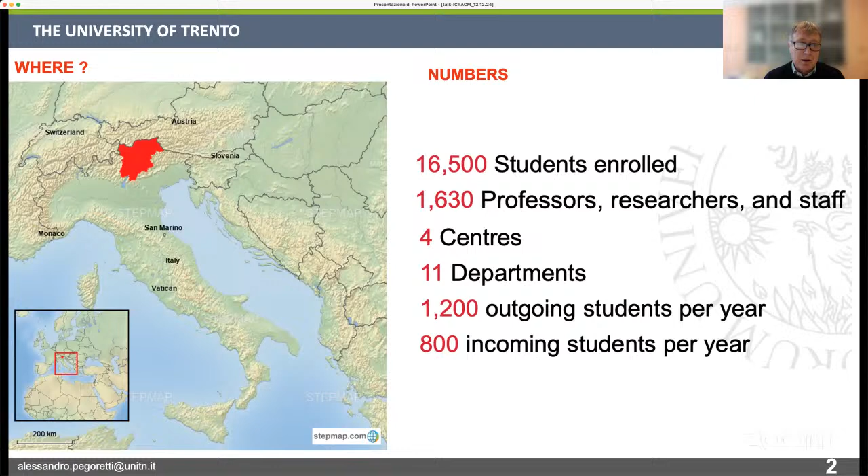First, let me briefly introduce the University of Trento. It's located in the north part of Italy, at the border with Austria and Switzerland. It is a medium-sized university in the Italian panorama, with roughly 16,500 students, 1,600 professors, and 11 departments. The Department of Industrial Engineering is one of them, composed of roughly 100 people between academic and administrative staff, and 200 people between PhD students and postdocs. The research areas range from materials, mechatronics, electronics, management, and biomedical. These are also the areas covered by our master courses, which are all given in English, making it an opportunity for abroad students to attend.

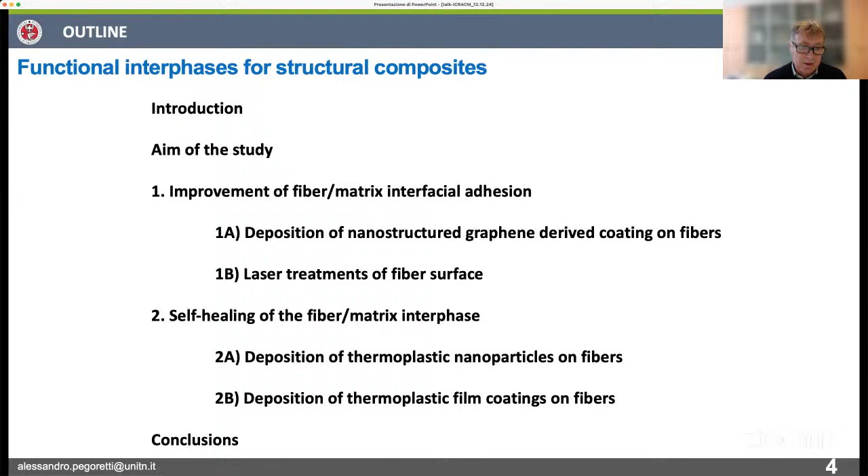Today I will focus my attention on functional interphases for structural composites. After a brief introduction, I will introduce the aim of the study, and then describe two areas in which we are currently working. One is the improvement of the fiber matrix interfacial adhesion, and I will show a couple of examples. Then I will move into another area, which is the self-healing of the fiber matrix interphase, and I will try to provide two examples of the typical activities we are running here at the University of Trento.

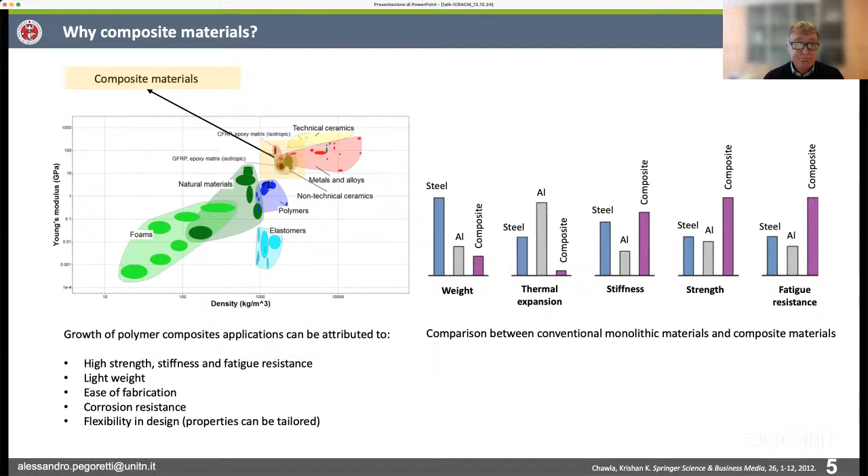Just a brief introduction on composite materials - I think it is not needed due to the type of conference, but we know that we use composite materials mostly because they are very light. They have a very low thermal expansion coefficient, and at the same time they are very stiff. They have very high strength and very good fatigue resistance. Applications are very wide, ranging across several applicative areas, the main one probably being transportation in terms of share.

For the market concerned, it is estimated that roughly 12.7 million tons are used worldwide, according to a recent survey by JEC Observer at the end of 2022. This represents a market value of about $40 billion in terms of material, and more than 100 billion in terms of components.

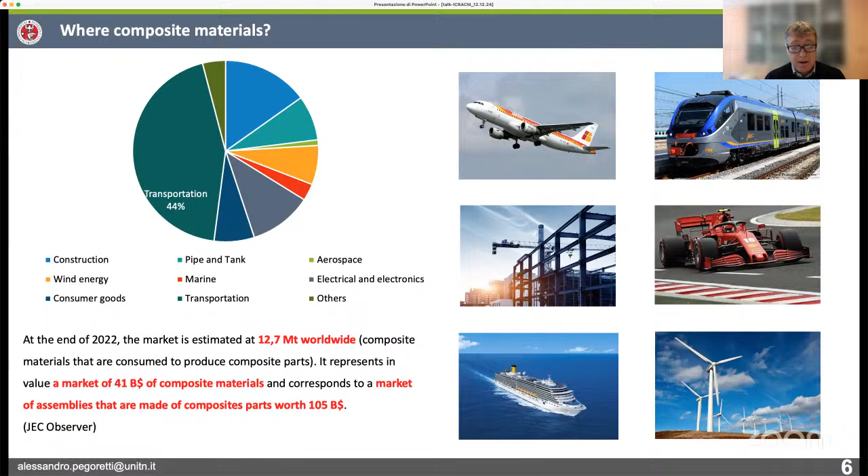Why is it interesting or necessary sometimes to focus on the interface? This was actually discovered years ago, when the first studies on interface and interfacial adhesion date back more than 40 years. It is, of course, a region in which a lot of properties are determined depending on the intensity of the adhesion, but also a region which offers opportunities to tune the properties of composite materials.

In terms of interactions, we can range from macromolecular interdiffusion, chemical bonds, electrostatic attraction, and also frictional roughening, thermal contraction, or mechanical interlocking. These are the main types of actions which can be tuned in order to adapt the mechanical properties of the composite material to the final application.

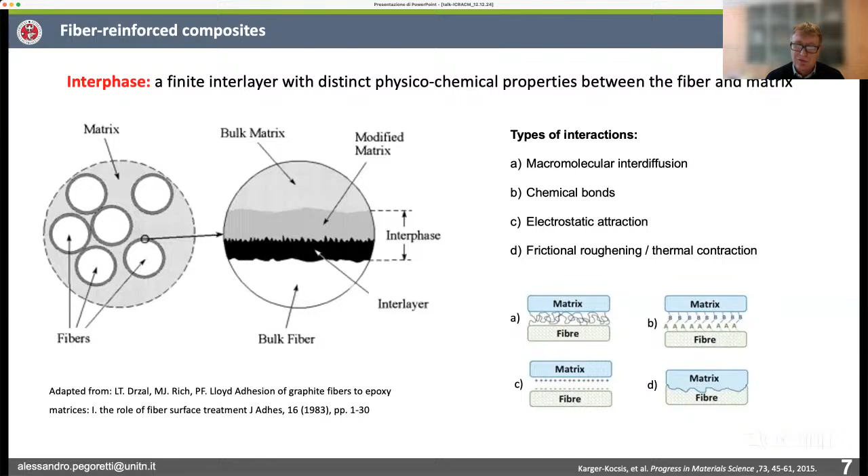In terms of experimental methods, it is interesting to observe that over the years a number of different testing methods have been developed. The most rigorous are based on single fibers embedded in polymer matrices, or in metallic or ceramic matrices, but mostly polymeric matrices. Some tests also regard the use of bundles of fibers, but if you browse the literature, the main two are the micro-debond test, which is widely used here in Trento—we have developed a facility to test combinations of fiber and matrix according to this technique—and the single fiber fragmentation test, which is also possible to perform here in our laboratories.

In the first case, the load necessary to debond a single fiber from a drop of matrix is basically measured. In the second case, the fragmentation test, we are measuring the length of the fiber when the saturation of the fragmentation process is reached, which is proportional to the critical length. We then try to find a link between this critical length and the adhesion at the fiber matrix interface.

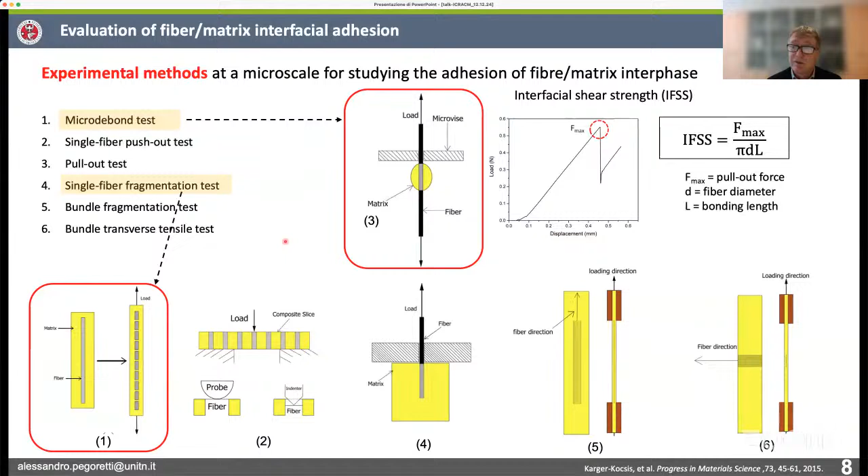In this area, regarding how to improve or modify the fiber matrix interfacial adhesion, there are two approaches: one is to modify the matrix, and the second is to modify the fiber.

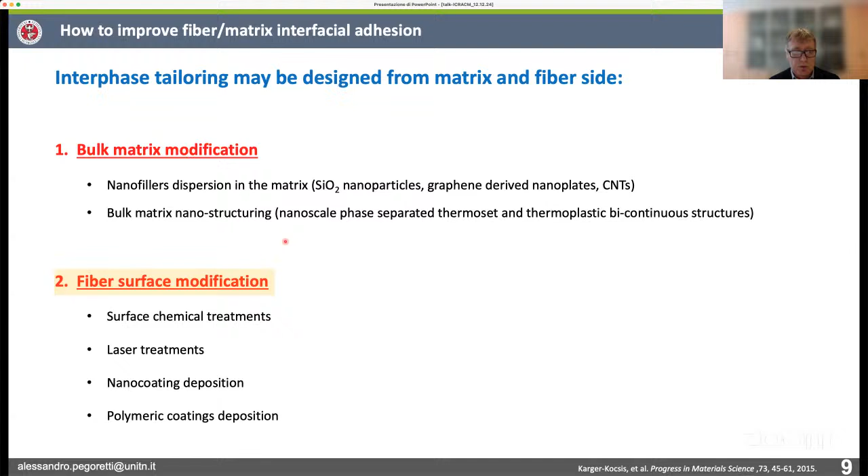In this talk, I will mostly focus on the second one, which implies some modification on the surface of the fibers in several ways. We can, for example, have a chemical modification by some chemicals deposited on the surface of the fiber, typically silane or titanate. We can also try to modify the surface of the fiber by laser treatments. These have recently been introduced due to the rapidity of the treatment and the possibility to tune the effect, as I will show you later.

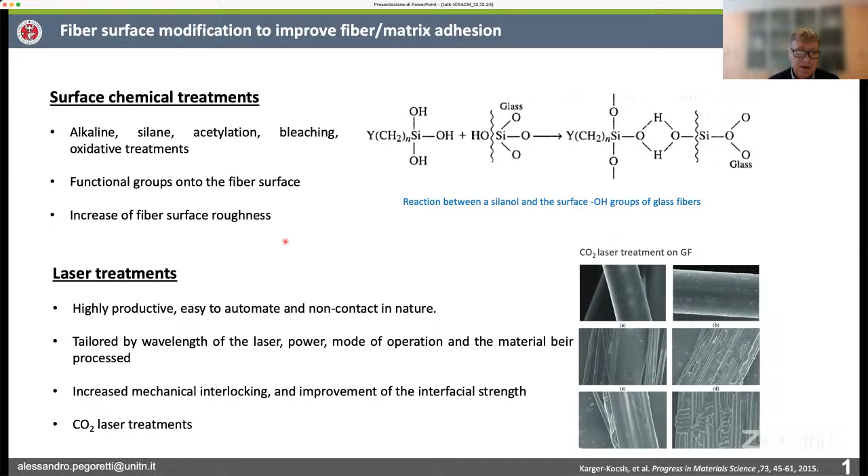Another possibility is to deposit either particles, for example nanoparticles, on the surface of the fibers—and I will provide some examples in this field—or to deposit a continuous coating, for example a polymeric coating, on the surface of the fiber in order to tune some of the interfacial properties. In this case too, I can provide some examples.

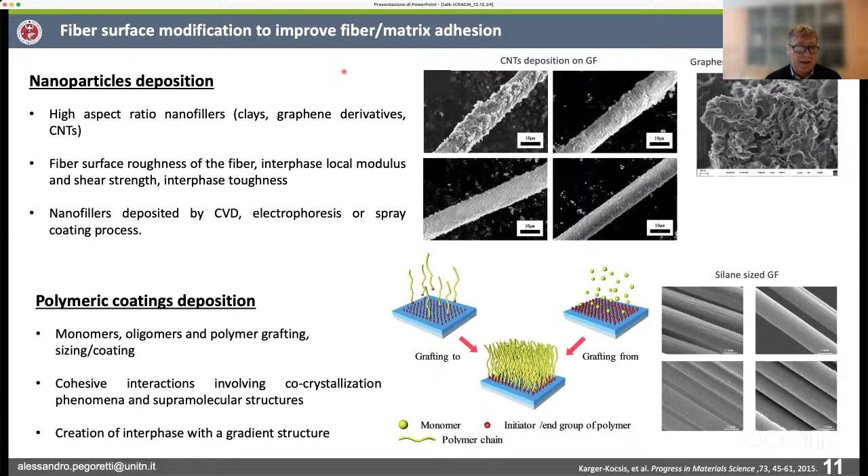This is why I call this talk multifunctional. I use this adjective because by tuning the fiber matrix interface, we have the possibility to induce some functionality in the composite material which is not present in the uncoated or untreated fibers.

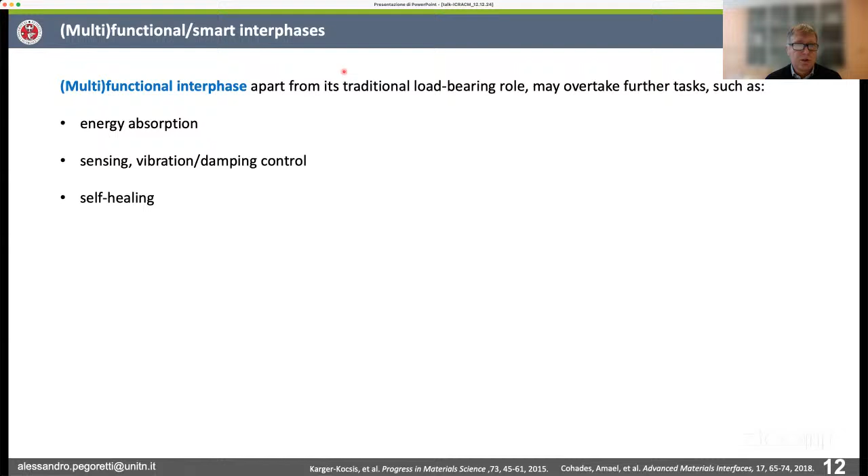For example, we can induce the capability in the composite material to sense external stimuli, such as mechanical strain. We can monitor the strain by changes in electrical resistance, which implies the composite material should be conductive, which is not always the case. If you think, for example, of epoxy glass composites, these are typically non-conductive, but they can be rendered conductive by properly coating the fibers in a suitable way. We can also increase or reduce the damping properties of the material, depending on the need.

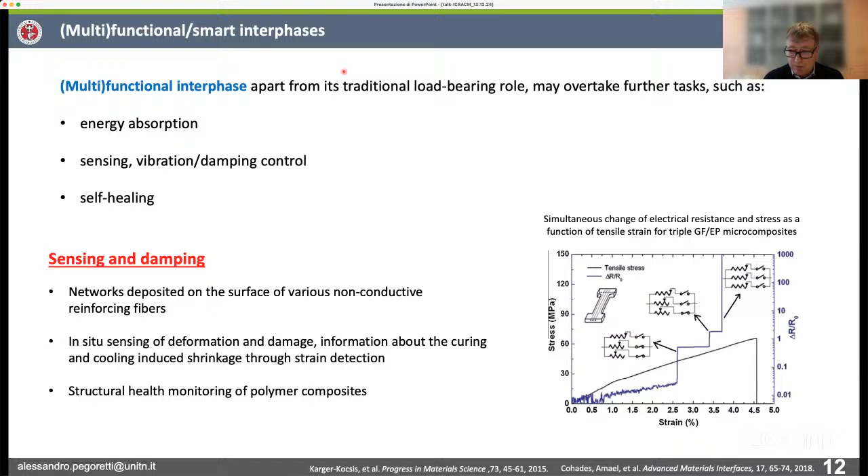Another very wide subject, quite intensively investigated today, is the capability to repair the composite material, the so-called healing or self-healing, depending on the external stimulus. This also regards the possibility to repair the fiber matrix interface—this region can also be repaired, as I will show you later in a couple of examples.

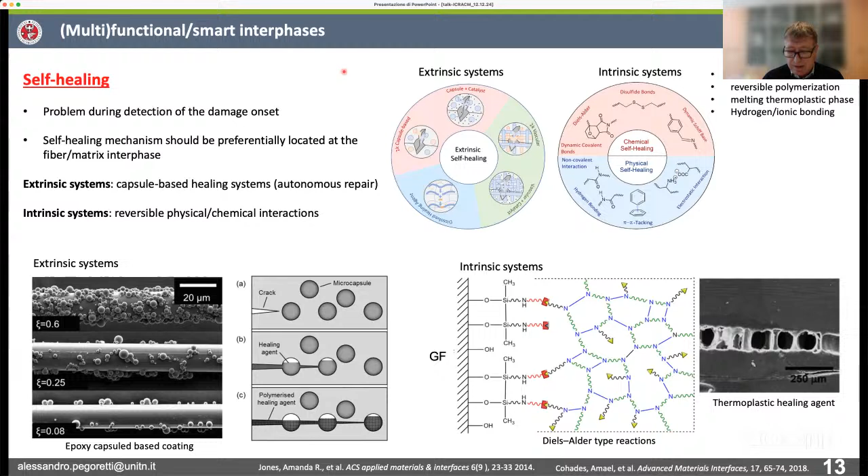This brings me to the aim of this study, which is interphase tailoring. In particular, we target two issues. One is whether it is possible to improve the fiber matrix interfacial adhesion. A couple of examples I'd like to show you: how we can improve this by depositing nanostructured materials such as graphene on the glass fibers, or how we can modify the chemistry, porosity, and roughness of the fibers by laser treatments.

This technique was applied on basalt fibers, and I will show you later the results that we can reach in this area.

Another area, as I mentioned before, is the possibility to somehow restore the initial mechanical properties after debonding or detachment of the fiber from the matrix due to a mechanical load. In this area, we try to achieve this in epoxy-based composites by depositing either thermoplastic nanoparticles on the fibers or a continuous film coating composed of a thermoplastic polymer on the surface of the fibers.

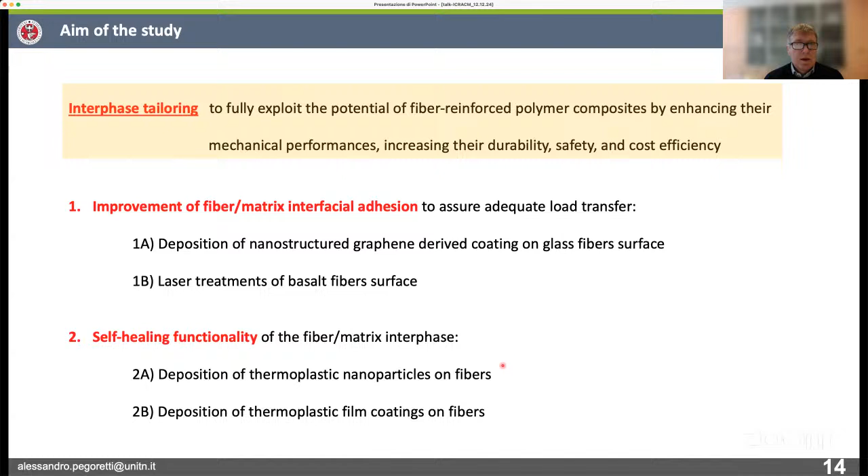Initially we started working with this technique, which is a relatively simple one. Here you can see the type of materials we use: an epoxy resin, and we selected some E-glass fibers. We also produced graphene oxide using the standard Hummers method, starting from graphite.

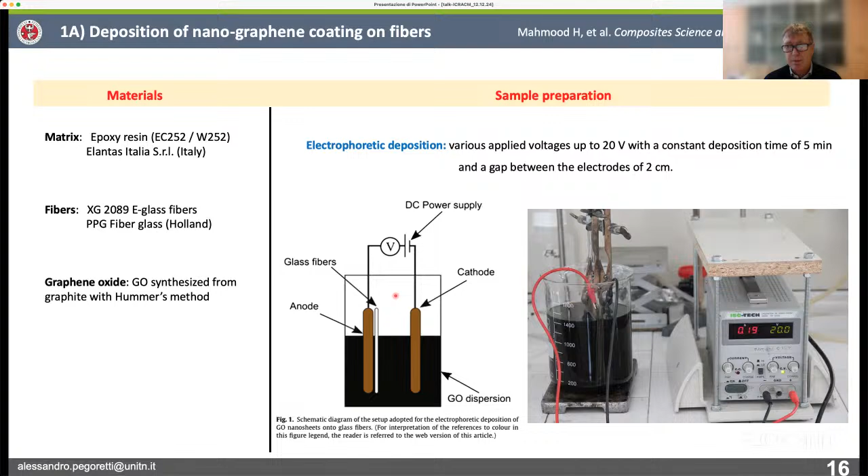We disperse the graphene oxide in water, basically in a very mild solution. Then we use electrophoretic deposition to force the coating of glass fibers with a layer of this graphene oxide. Here you can see the laboratory setup we use for this very simple experiment.

The experiment is simple, but the effects are very interesting, because you can see how it is relatively simple to coat the glass fiber with a continuous coating composed of graphene oxide. Here you can see that by changing conditions, for example the voltage used in the electrophoretic deposition, it is possible to change the thickness of the layer deposited.

It is also possible to chemically reduce the deposited graphene oxide to reduced graphene oxide, which at this point becomes an electrically conductive layer.

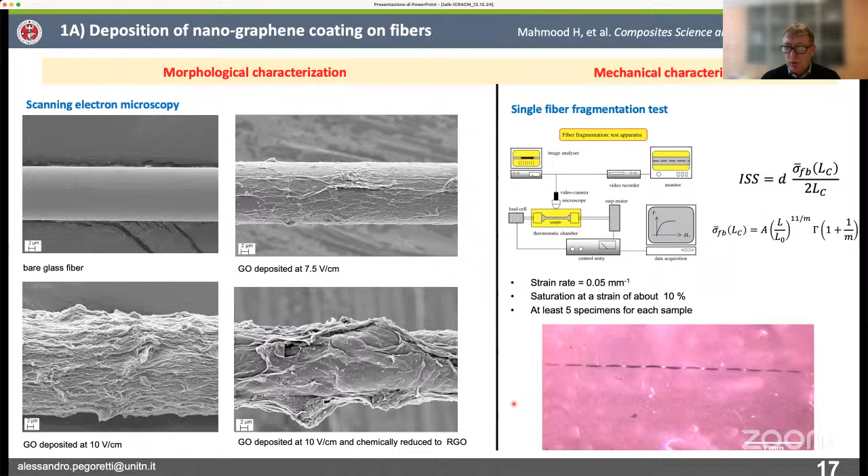How did we measure the effect on adhesion? We used the single fiber fragmentation test. Here you can see the configuration: basically we embedded a single fiber in a coupon of matrix, then loaded this coupon, and with a microscope we observed the generation of fragments, which are quite evident in this picture.

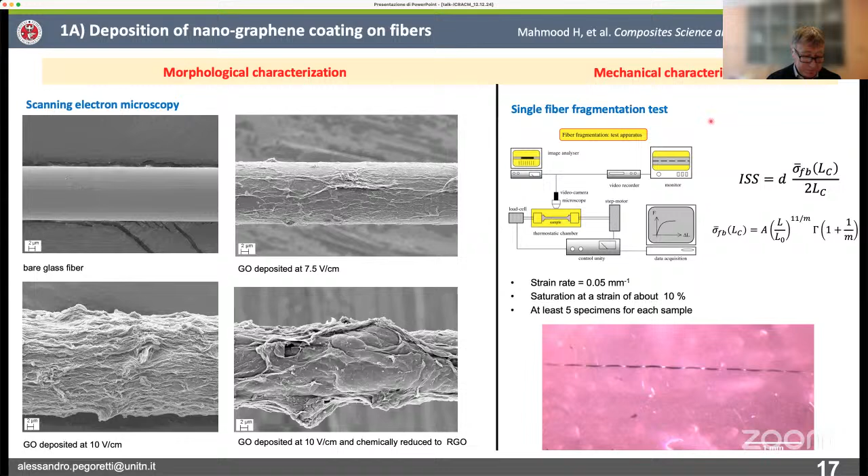At the end, when saturation of the process is reached, you get a length called the saturation length, which is proportional to the critical length. This critical length allows us to determine the interfacial shear strength. This is the typical way this data is collected and analyzed in the literature.

If you look at the effect, we can observe a clear increase in interfacial shear strength as we increase the electric field used in the electrophoretic deposition. Let me point out that an increase in electric field means an increase in coating thickness, as documented by this data, which reports the weight increase in the fabric tissue we use under different electric fields.

As for the improvement achieved, we reach a very high improvement in interfacial shear strength—more than 3 times—by using graphene oxide, and a bit less, around 88%, by using reduced graphene oxide. The situation is documented in this plot.

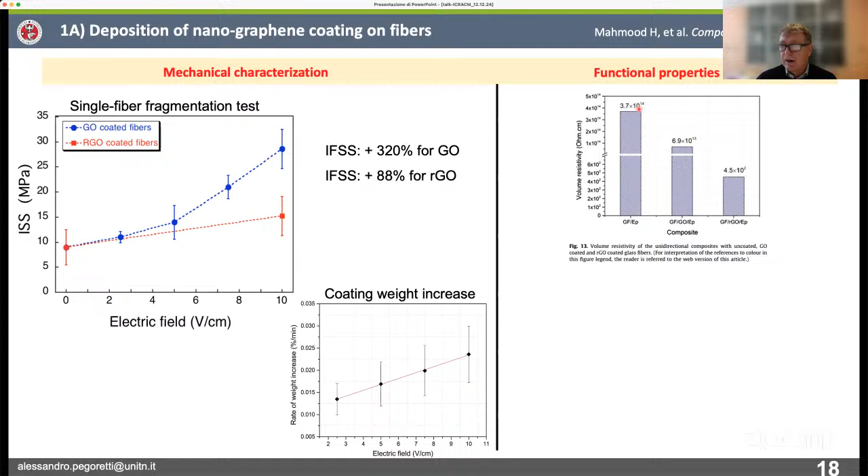A side effect, but a positive one for some applications, is that by using reduced graphene oxide, the resistivity of the composite decreases. If you look at this bar, we reach a resistivity in the composite material that is very low, meaning quite high electrical conductivity, especially compared to the uncoated materials. So we move substantially from an insulating to an electrically conductive material.

And we test the material under tension, while simultaneously measuring the electrical resistance.

Here the two quantities, the stress and the strain, and concurrently the change in electrical resistance are simultaneously plotted in this slide. You can see that by monitoring the change in resistance, it is possible to estimate the strain and therefore the stress applied in the composite material. So it's possible to monitor a structure by measuring the change in electrical resistivity.

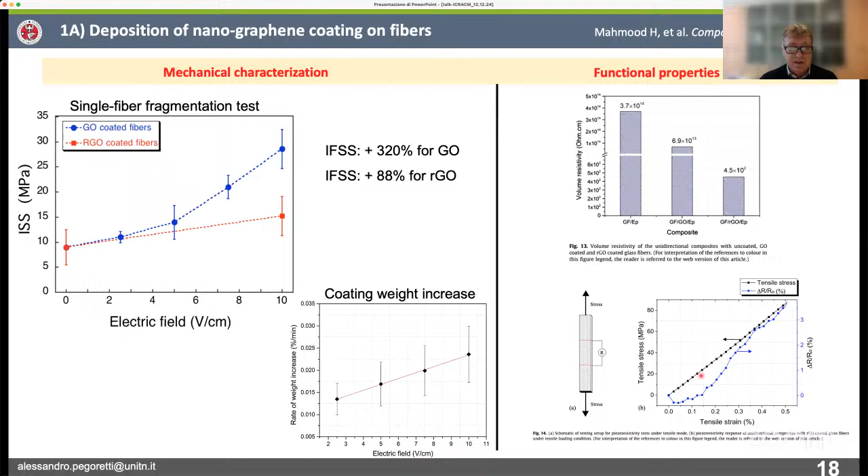In order to scale up the process, because the electrophoretic deposition equipment we used was a very small one, we use another technique, which is tribo-electrification.

It is a very simple concept. Basically, when you are sliding two different materials on top of each other, you can generate charging in one of the two, or in both actually, and by selecting the proper triboelectric series, you can force positive charges onto the surface of glass fibers.

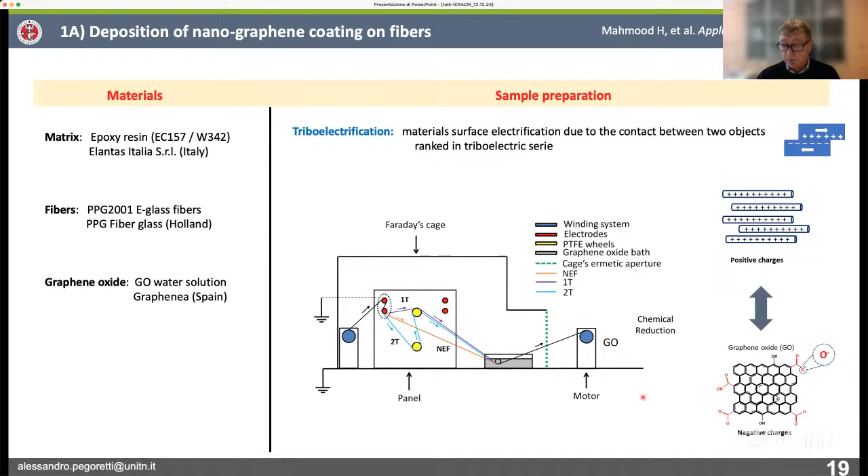In this case, we use Teflon rollers on which the glass fibers were rubbed. At the end, you get a positively charged fiber, and if you have a bath, like in this case, containing negatively charged graphene oxide, you can obtain a coating on the fibers by a very simple technique. Here you can see some pictures of the coating we achieved.

Here you can see different percentages of graphene oxide in the solution, and also different intensities of the rubbing against the Teflon rollers.

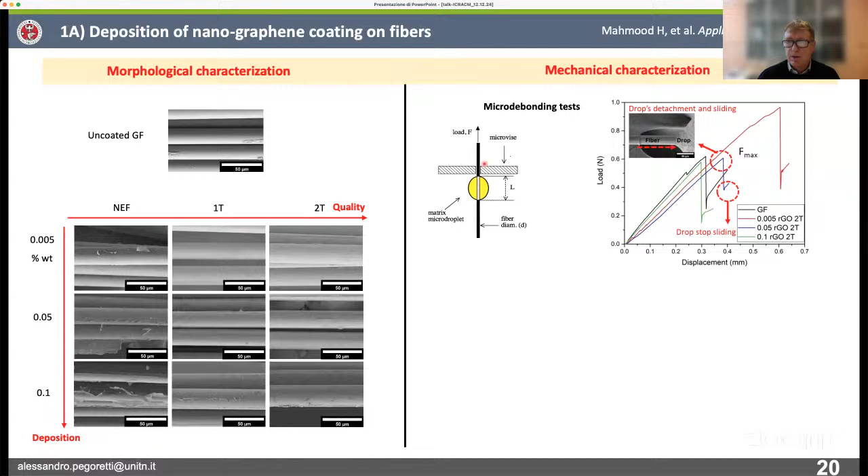In particular, we measured the micro debonding by using a very simple test that I already introduced before. By measuring the maximum load, which can be normalized to the contact area between the drop and the fiber, it is possible to obtain an interfacial shear strength.

on the surface of the fibers. With proper optimization of the conditions, it is possible to increase the adhesion from the initial value by a factor of roughly 0.5, so roughly 50%. This is basically how we can improve the adhesion in a relatively easy way.

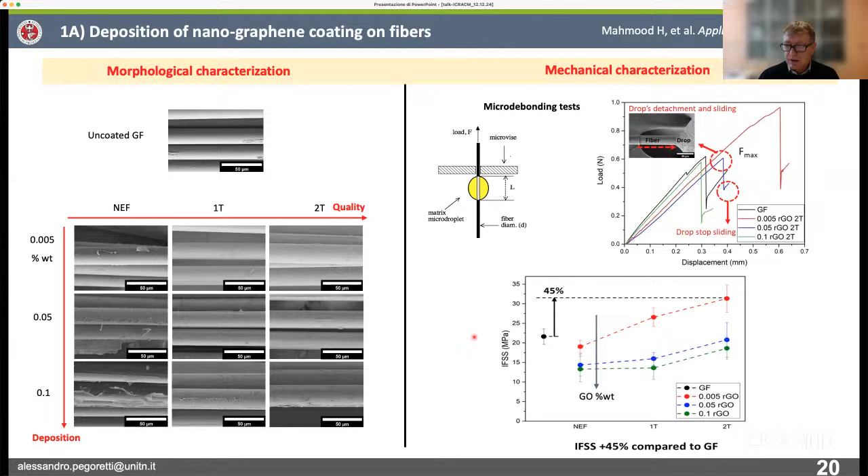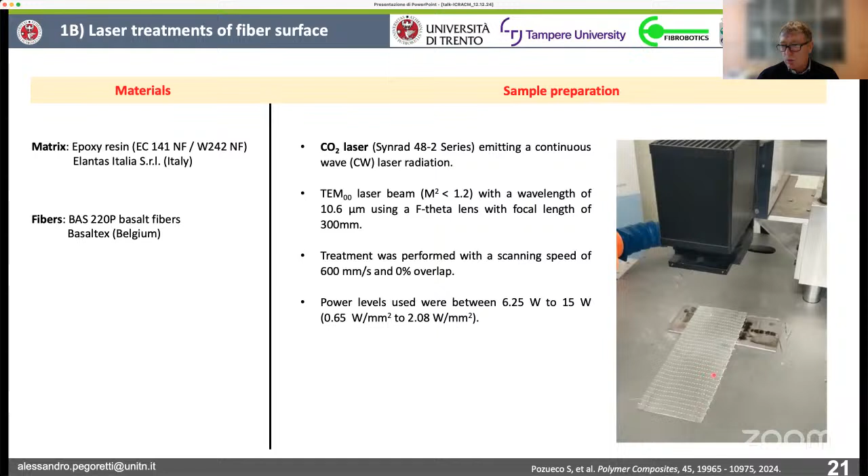Another possibility is to use laser treatments. Here we use basalt fibers. This was a collaboration with colleagues in Finland and also in Spain. Here you can see the treatment of the basalt or glass fibers. We used both, but the study mostly focuses on the basalt fibers.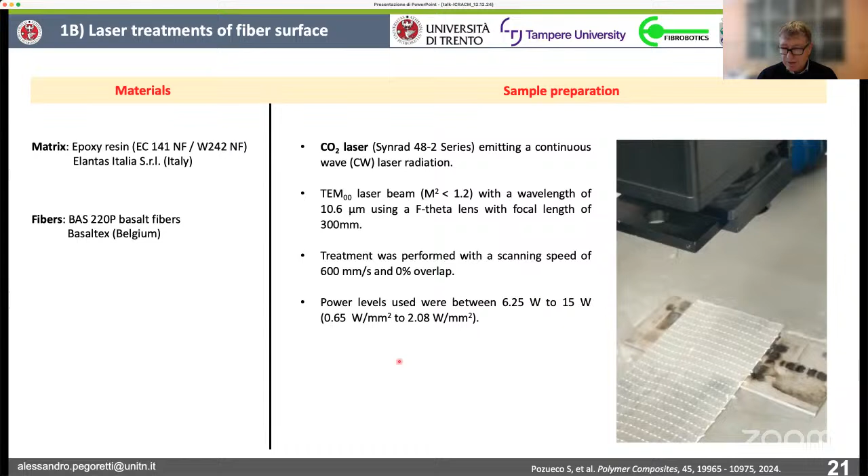The scanning can be performed in a relatively fast way, and the power of the laser can be changed. This leads to different effects on the fabric. In particular, by using both optical and scanning electron microscopy, you can observe the effect, which changes with the power used during treatment.

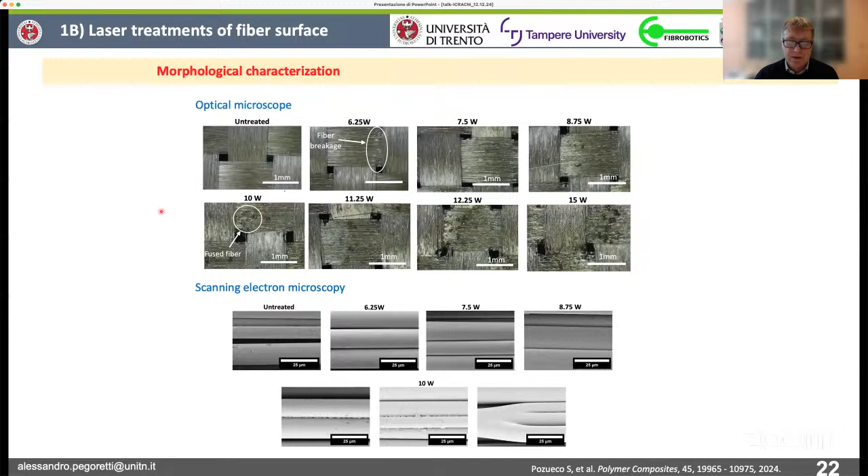If you look at the picture, you can see that after a given power, the fabric is damaged, so it is not suggested to use a power that is too high. On the other hand, if the power applied is too low, there are basically no effects on the fibers, so we have to optimize these processing parameters.

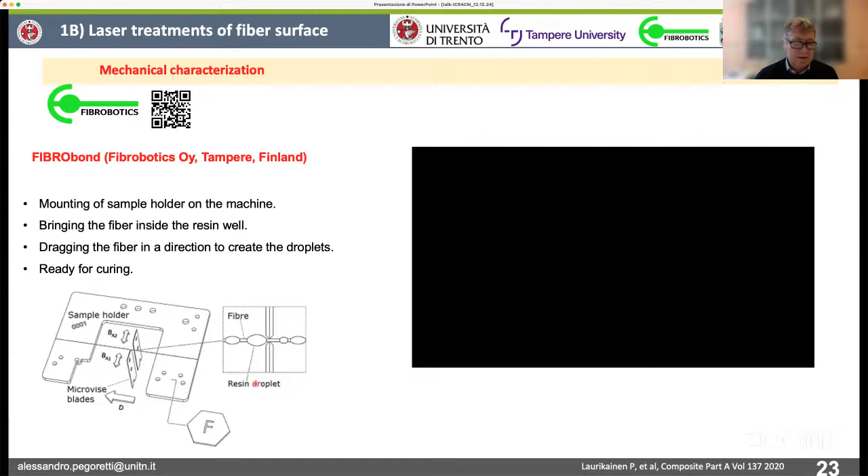How we measured the effect is quite interesting, because we established a collaboration with colleagues in Finland, in particular the University of Tampere, and also with a spin-off of the University of Tampere called Fibrobotics. This company produces a tool which is very interesting because it allows performing the micro debond test in a much more automated and faster way.

Here you can see a movie that we took during the test. This is actually the preparing stage, during which you can deposit a single drop of resin on fibers, both carbon and glass fibers.

In this part of the movie, you can see the fiber we use, in that case glass fibers. The glass fibers are measured, the diameter, and next we have to deposit the resin.

So we start from a liquid pot of resin, which is in this area of the device, and the fibers are pulled through the bath in order to generate these small droplets on the fiber surface. In this movie, you can see the formation of these droplets.

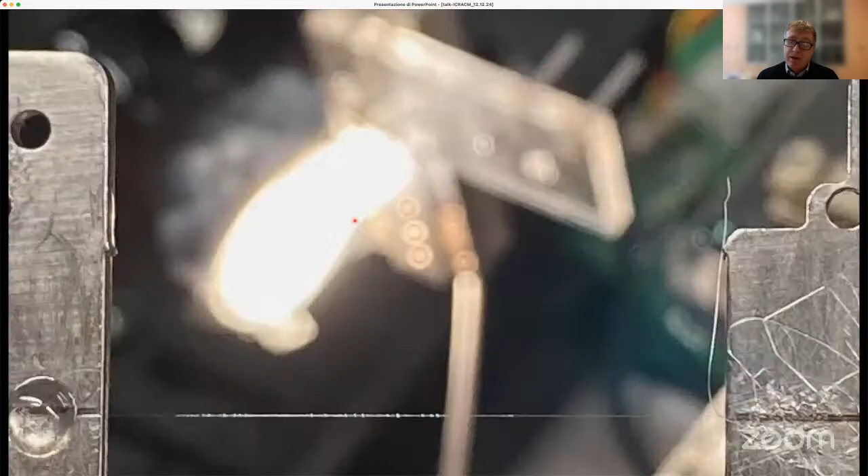Of course, depending on the viscosity of the resin and the velocity of the fibers, we can reach two conditions. Either we can deposit droplets, like in this case, or by reducing the speed, we can deposit a continuous coating on the fibers.

Here is another movie showing the test performed by the same machine. After the droplets are deposited on the fibers, it is possible to test them by performing the pull-out, the micro-debonding, directly in the testing machine.

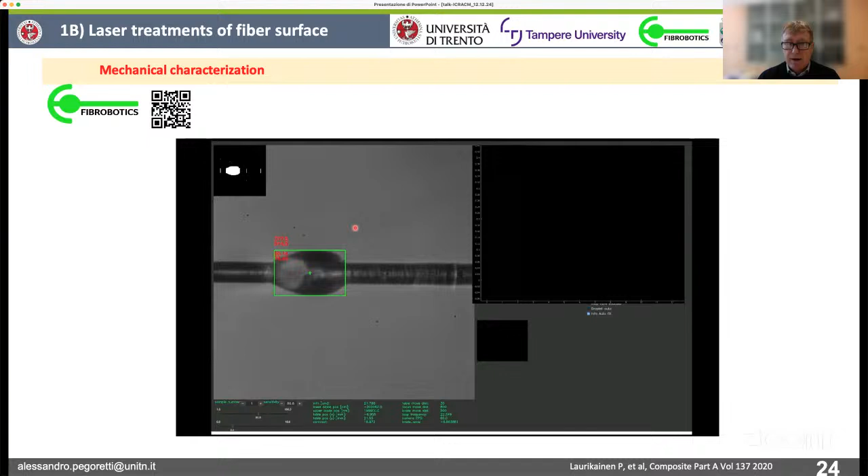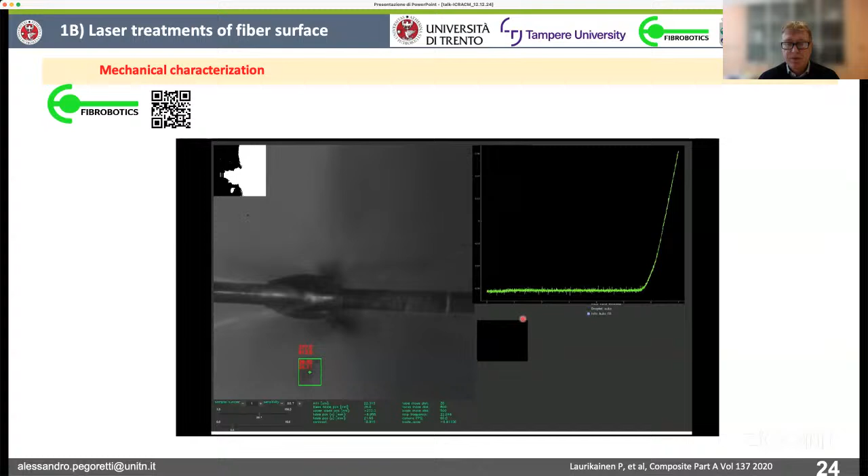Now the movie started, so you can see the fibers moving, and now we reach a contact between these grips, and the force starts to increase until we reach a break. Basically we separate the fiber from the matrix. Of course, the load does not drop to zero because we have some friction between the fiber and the matrix.

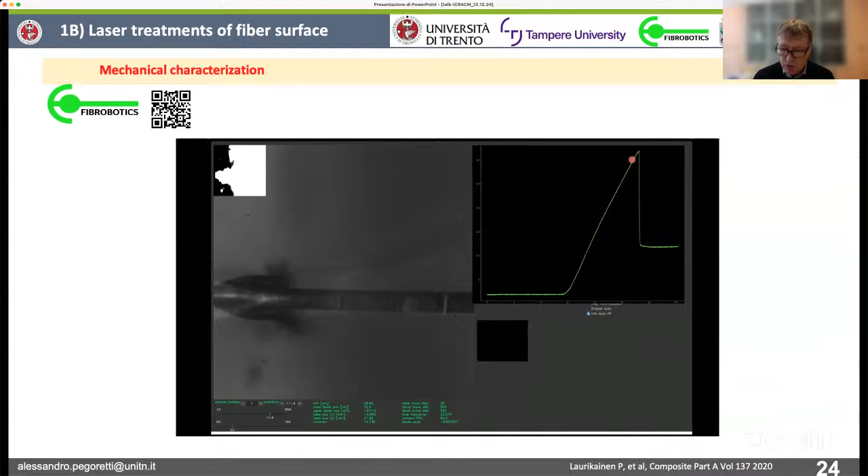This plateau represents the frictional forces between the fiber and the matrix, which are also interesting to measure. The maximum force is here, and from this maximum force we can measure the interfacial shear strength according to a model. The advantage of this technique is that a lot of points can be collected.

We can change the droplet area because by using the microscope on the machine we can measure the size of the droplet, and the size changes droplet by droplet. So we have a plot of the maximum force, which is the force I showed you before during the test, as a function of the droplet area.

The slope of these lines represents the interfacial shear strength, so it can be converted into an interfacial shear strength, IFSS. And for us concerned, the...

laser effect, the effect of the laser treatment - we can see that initially, when the power increases, we get a decrease of the interfacial shear strength. Probably here we are just removing the coating on the fiber, the sizing. And after we can have some positive effect, but with a limited extension.

So at most we reach 8%, but with a large standard deviation. So basically we are not very much satisfied until now with this technique, but we are still evaluating if some improvements can be reached.

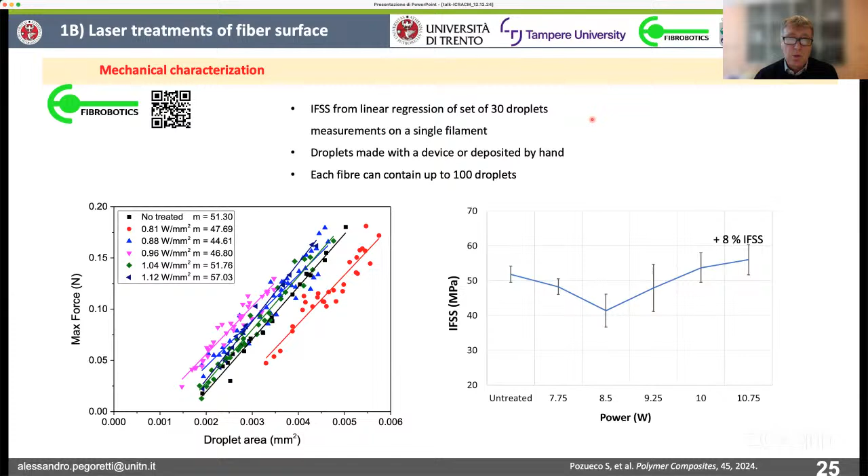At this point, I would like to move to the second part, which is more on the self-healing and how we can repair a broken interface. Of course, this process cannot be performed in a standard composite material composed of carbon or glass fiber in an epoxy matrix, because epoxy is a thermoset material that cannot be repaired easily.

So in order to achieve this, we have to use several techniques. The one we decided to use is to deposit a thermoplastic material in the form of either nanoparticles or a continuous film coating on the surface of the fiber.

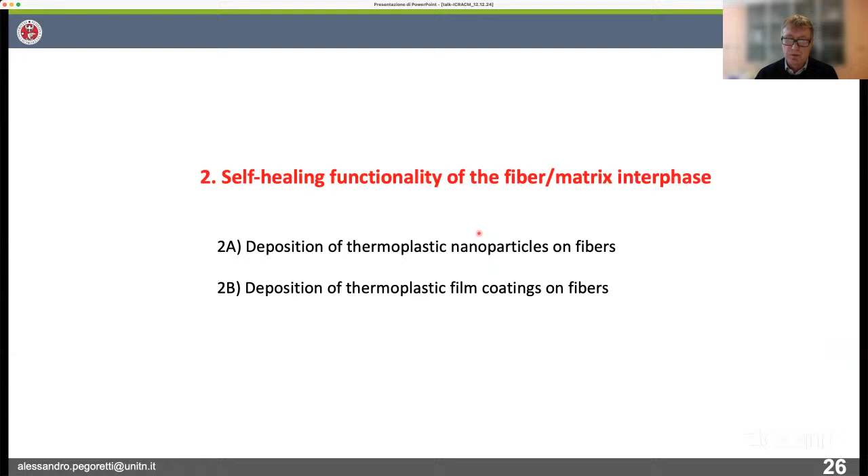At this point, if there is a layer of thermoplastic material on the surface of the fiber, we can imagine applying a temperature increase in order to melt the thermoplastic polymer and somehow restore the initial adhesion. Of course, the thermoplastic polymer must be properly selected.

One of the main thermoplastic polymers used in this field is polycaprolactone, PCL. It has been widely studied. For example, in Lausanne, EPFL, Professor Michaud has a spin-off company producing prepreg containing polycaprolactone, which is very active and can induce a repair of the polymer in the composite material.

So we selected this polymer, which has a relatively low melting point, around 60 degrees, and therefore is suitable to be used also with standard epoxy matrix. We selected a standard epoxy matrix and also glass and carbon fiber, so we used both types of fibers in these investigations.

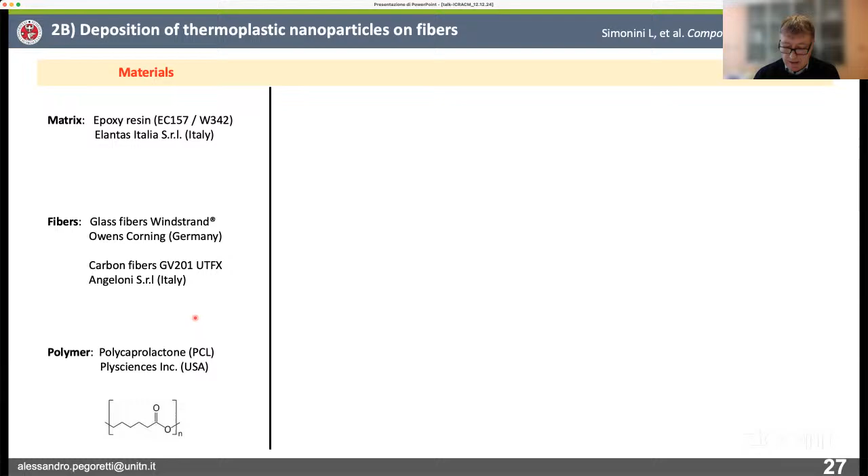How did we coat the fiber with nanoparticles? Of course, we first had to generate a stable suspension of nanoparticles of polycaprolactone in a water solution. This took us some time because it is not easy to find the right ingredients to reach this condition and impede the coalescence of these very small particles.

But in the end, we managed this. And then we used this solution containing negatively charged polycaprolactone nanoparticles by using electrophoretic deposition, a technique I already mentioned before. With this technique, it is possible to force the charged particles to migrate and move onto the surface of the glass or carbon fibers.

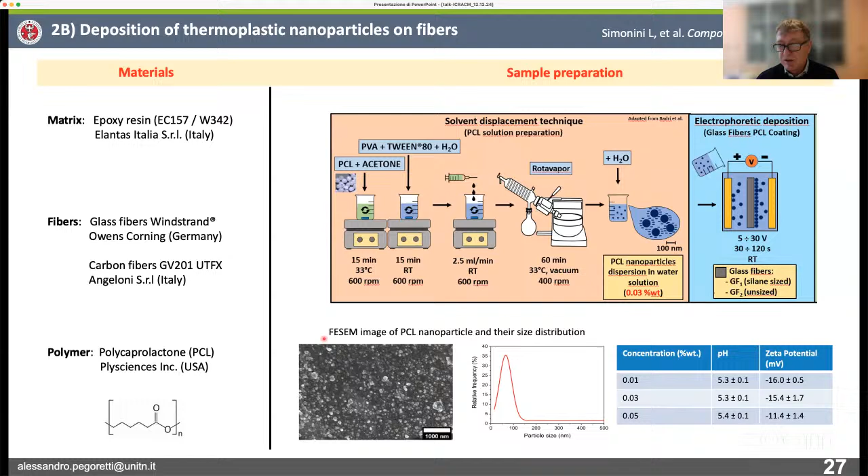Here you can see some data about the size of the particles. They were under 100 nanometers, so relatively small, with a narrow distribution of course. And here you can see a picture of how the glass and carbon fibers can be coated quite efficiently using this technique, with relatively small particles of polycaprolactone.

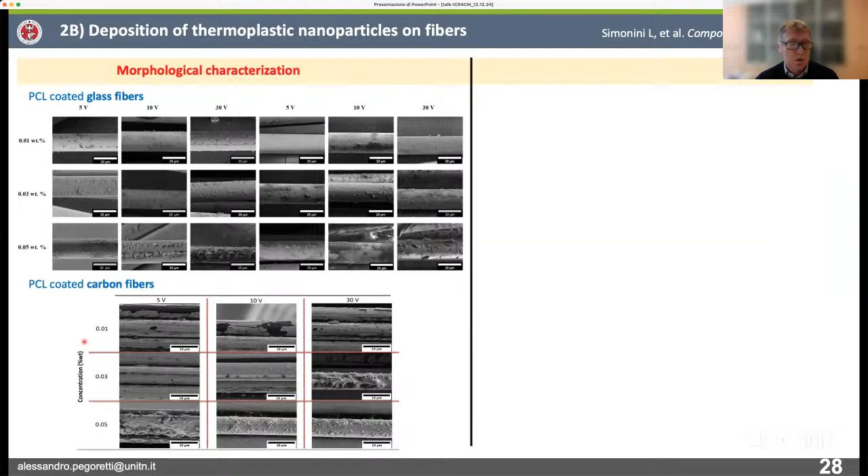At the end, we measured the initial adhesion, and then after the fiber matrix interface was damaged and broken, we healed the material at 80 degrees C for half an hour, and then we tested the adhesion again using the device I showed you before, which was used in collaboration with the University of Tampere in Finland. In this way, we can measure healing efficiency, which is the ratio between the interfacial shear strength in the healed system over the interfacial shear strength in the unbroken, initial system.

Here you can see a summary of the results on glass fiber coated with nanoparticles of polycaprolactone. Positively, we observe an increase of the adhesion by the deposition of nanoparticles. After the fiber matrix interface is damaged, we were able to reach a healing efficiency, meaning how much of the initial adhesion we can restore, of about 50%. So basically half of the initial adhesion can be recovered using these conditions.

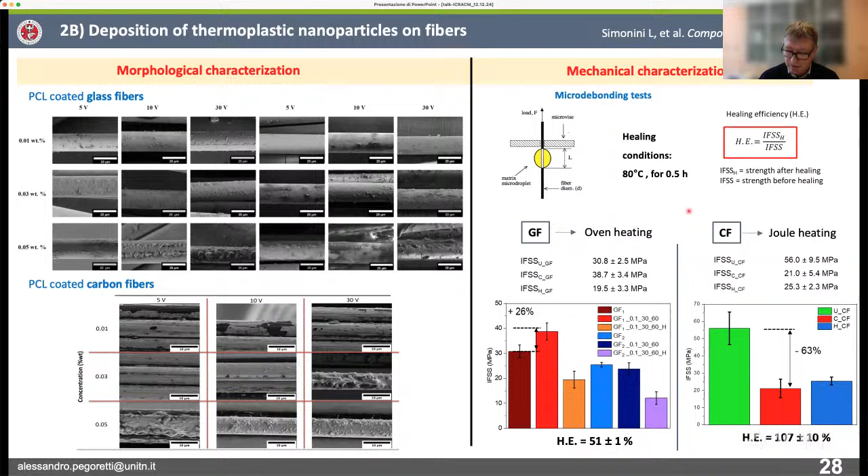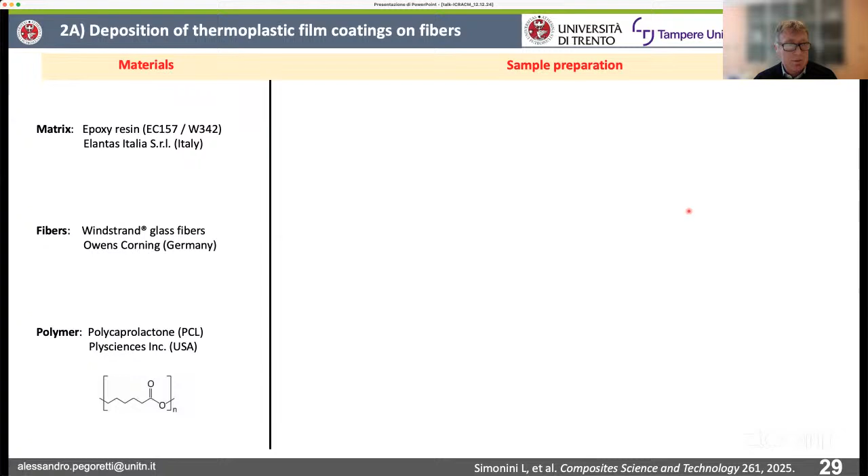Now, we decided to investigate, using exactly the same materials - epoxy, glass fibers, and polycaprolactone - the possibility to reach a continuous coating on the glass fiber using the same machine I showed you before, by changing the velocity of the fiber as it moves into the liquid resin. It is possible to deposit a continuous coating of polycaprolactone on the surface of the fibers.

According to our determination, the initial diameter of the fibers was 18 microns, and we were able to reach a final diameter of about 22, which was the highest diameter. Therefore, you can evaluate a thickness of the deposited PCL coating layer of about 2 microns.

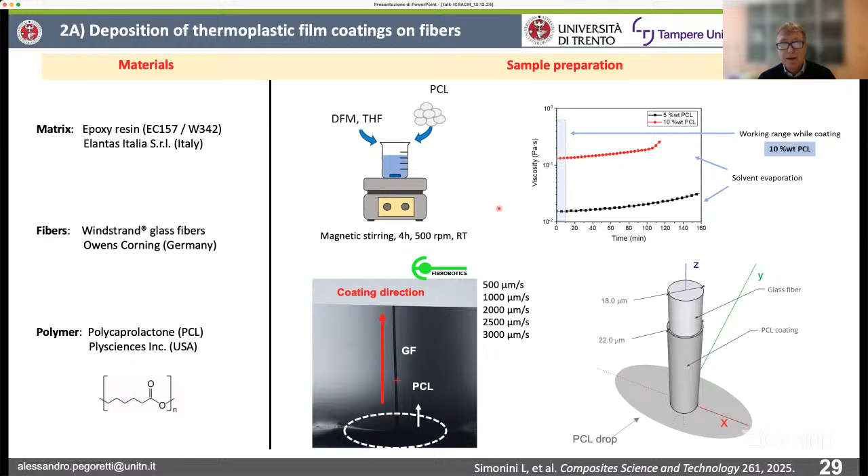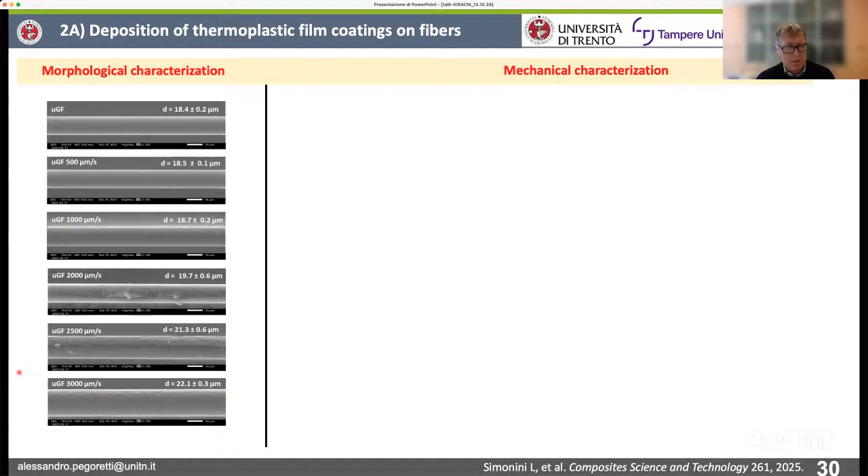Here you can see the initial fibers, uncoated. The diameter is roughly 18 microns. And then at different velocities of extraction, by changing the velocity, the diameter increases until about 22 microns, which indicates a coating that is quite homogeneous on the surface of the fibers, composed of polycaprolactone.

At this point, using the machine I already introduced before, in collaboration with Fibrobotics, we measure the adhesion with a large number of experiments. If you do these experiments manually, it takes too much time - it's not possible. So you really need an automatic machine to do this type of test, in which we can deposit several droplets, more than 30 or 40, on the same fibers, and then test them in a quite automatic and continuous way.

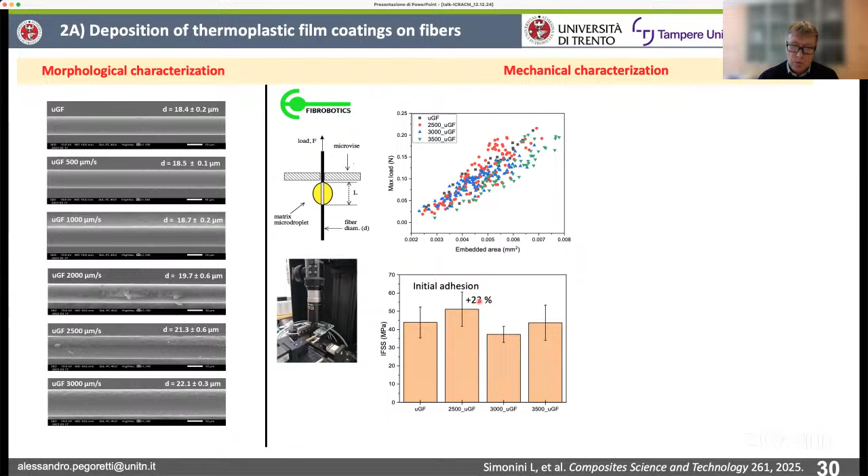Again, by the slope of the regression line used to fit this data, you can get the interfacial shear strength. Here you can see the values. The initial adhesion was actually improved by about 23% using this condition, a speed of 2.5 millimeters per second in the extraction, and this was a positive thing. So we decided to focus our attention mostly on this condition.

And we evaluate the healing efficiency more or less in the same way. So basically, we tested the fibers before and after healing, and we compare the results in a ratio which is called healing efficiency. At this point, we can go into the results.

Here you can see that for the conditions we ultimately selected, you can reach an increase - this is the healing efficiency reported. You can see that the healing efficiency is quite high. Here you can see 3 bars because we healed the interface 3 times consecutively: we broke the interface once, then a second time, and a third time, so you can see 3 different values. The first value is generally the highest, and we can reach values around 100%, so we can fully restore the initial adhesion.

But after the first test, we observed a decrease in the healing efficiency. That was quite a surprise. I mean, at the end, we were hoping to be able to restore these mechanical properties more than one time consecutively, several times actually.

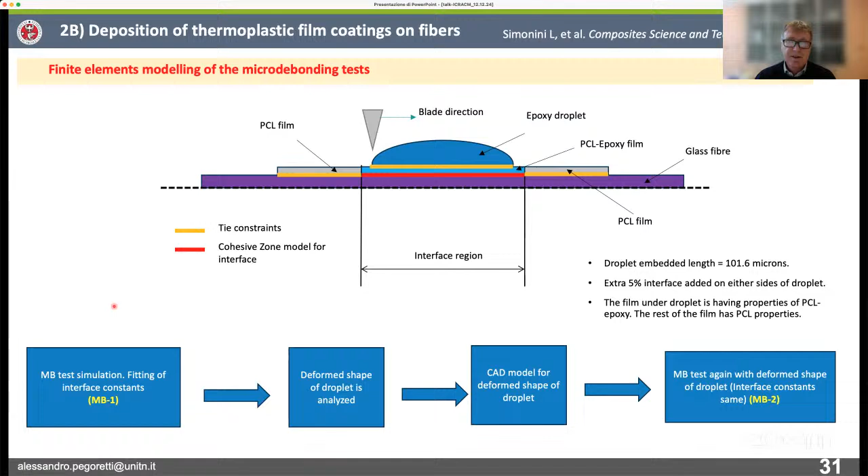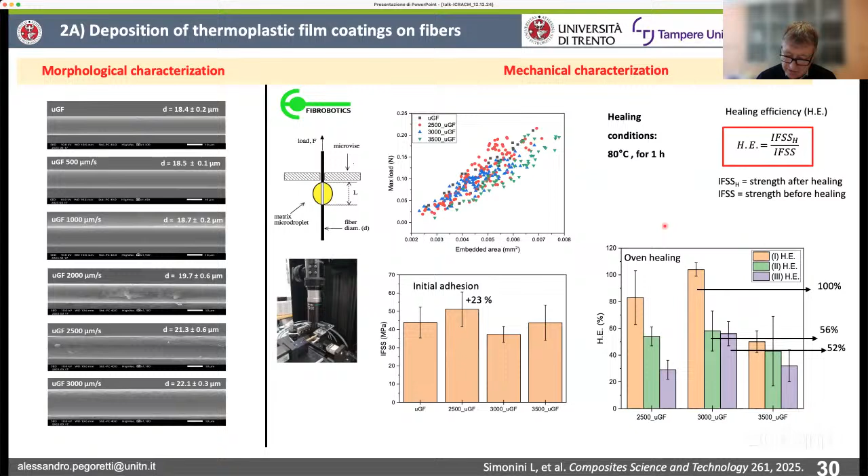Then we analyzed the process. What we observed is that after the first healing, the droplet actually changes geometry because it is in contact with the blade. This change in geometry was not taken into account in our calculation. So if I go back, in this calculation of the healing efficiency, we assumed the same shape of the droplet each time. We did not account for the fact that each time we repair the interface, we have to test it, and therefore we deform the droplet.

These are 3D images taken by the optical microscope on the equipment. With this, we were able to reconstruct the exact geometry and model it using the finite element method. The results are summarized here.

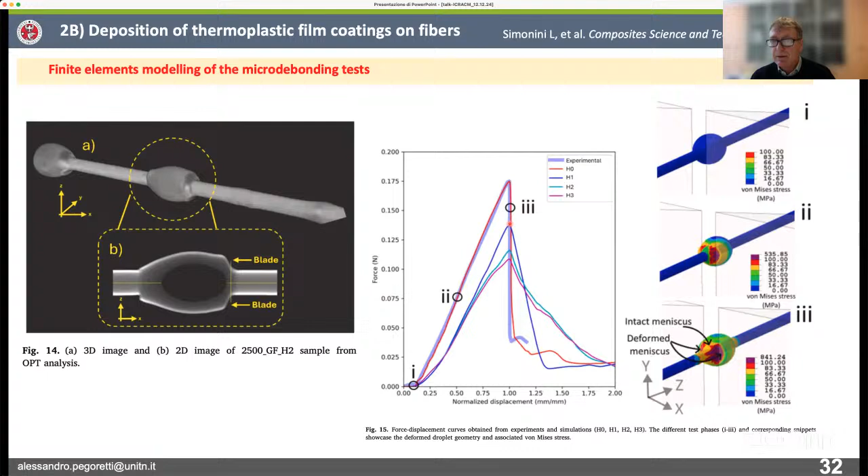It's interesting to see that the predictions, shown as the continuous curve, follow the experimental data very nicely, so we can reproduce the experimental data. At the same time, we observe that after the first healing, a drop in the force occurs due to the change in geometry. So this drop in force is not necessarily associated with a drop in adhesion. We have to take this effect into consideration in order to correct the model and its prediction of interfacial adhesion.

This brings me more or less to the conclusion of this talk. I would like to summarize what I showed you. Basically, we are recently focusing our attention on the so-called tailoring of the interphase region, with two main aims: one is to improve interfacial adhesion, and the second is to possibly induce healing or generate a repairable interface.

For these two areas, we explored several possibilities. One was to deposit, by electrophoretic deposition or triboelectrification, a layer of graphene, using graphene oxide and reduced graphene oxide, reaching very interesting results in terms of improved adhesion. In the second case, we used a laser treatment. The results were less intense in terms of interfacial shear strength improvement, but the technique is very fast and quick, and it does not require any chemicals. So maybe we will continue this analysis to see if better results can be achieved using laser treatment.

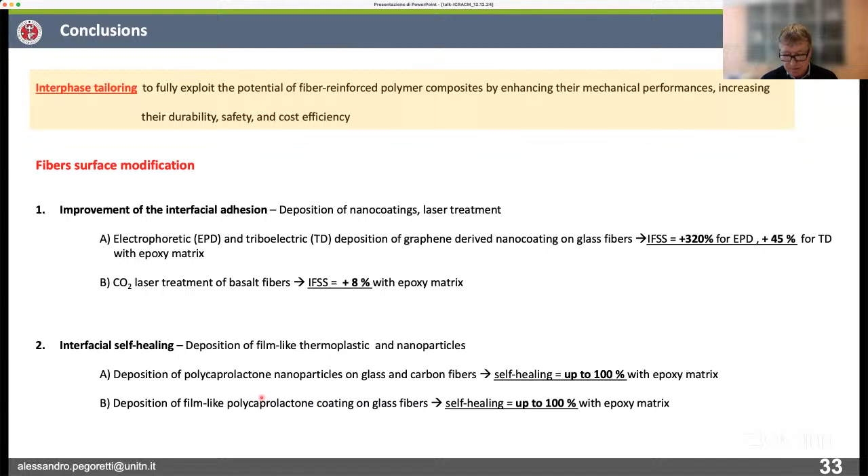In the second part, we used a thermoplastic material deposited on the fibers, both glass and carbon fibers, in the form of either thermoplastic nanoparticles or a continuous film. The material we selected was polycaprolactone, and we observed that it is possible to heal the interface, repairing it up to 100% in the case of carbon fiber. We also reached 100% with glass fiber, in this case using a film rather than nanoparticles on the surface.

I want to thank some colleagues in the group, in particular Harun Mahmoud, who is now a postdoc here in Trento and did part of his PhD project on this, and also Laura Simonini, who is also now a postdoc in my group and one of the main contributors to this activity. I also have to thank the sponsor of this project, the US Air Force—I did most of this activity within this grant. I would like to thank you very much for your kind attention, and I'm available for questions if any.